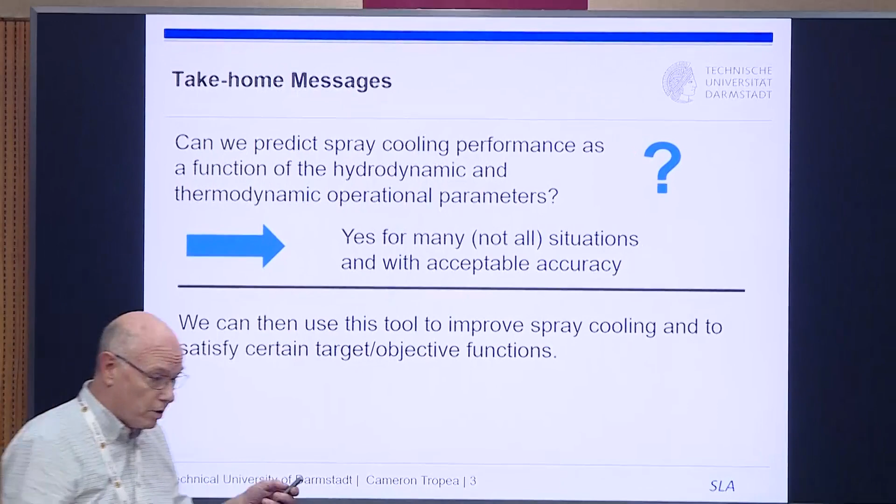Can we predict spray cooling performance as a function of the hydrodynamic and thermodynamic quantities? The answer is yes, we think we can do that, at least approximately, with some acceptable accuracy. And then the fun starts, because if you can do that, we could use that information to improve the spray cooling, or if we had a certain objective function we wanted to attain, how do we do that? What would be the Pareto curve to get us closest to that function? So that's the take-home message.

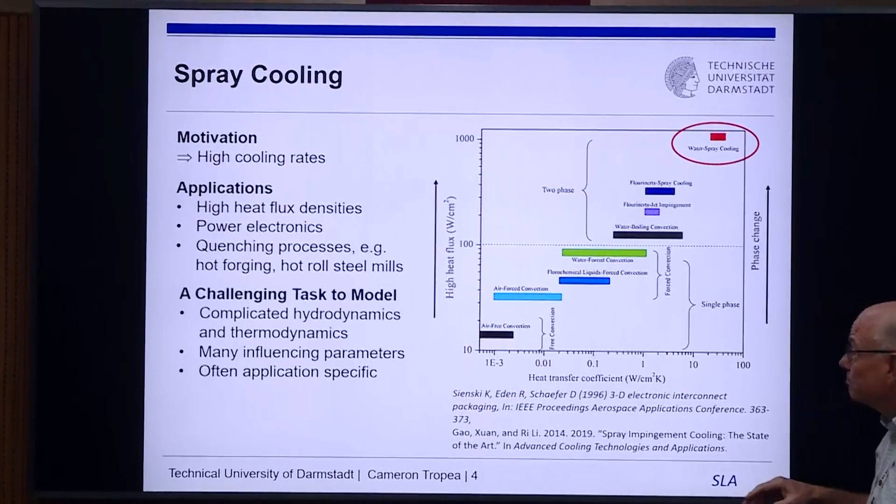This one I don't have to show you, you've seen it once or twice from several people. But obviously, cooling with phase change is better than without phase change, and that's water spray cooling. So there's interest in that, usually for high heat flux densities and high temperatures. The big problem is, of course, it's not easy to measure, and things happen at small scale, so there are a lot of empirical equations. We've seen several empirical equations today, and everybody knows: be careful, just use it in the field or range in which it was derived.

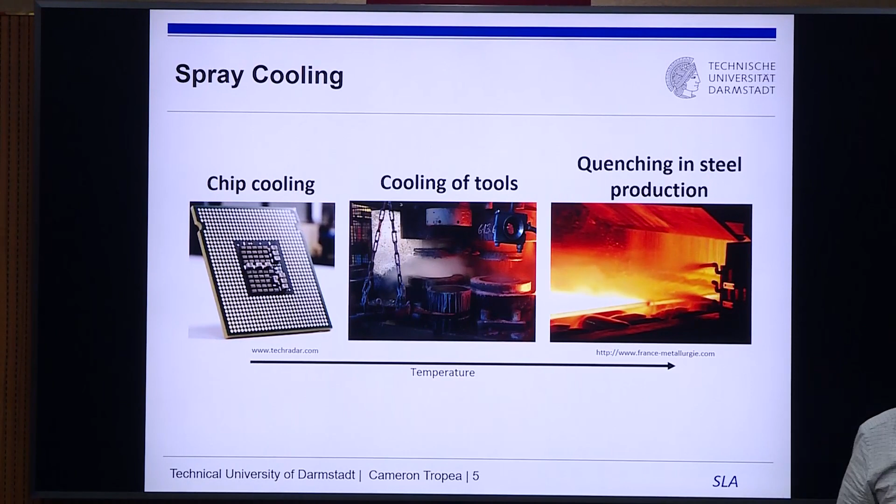I think we can skip this. Susmita showed us a wonderful picture of the same, so everybody knows where you use spray cooling. And the idea is we need good models for it.

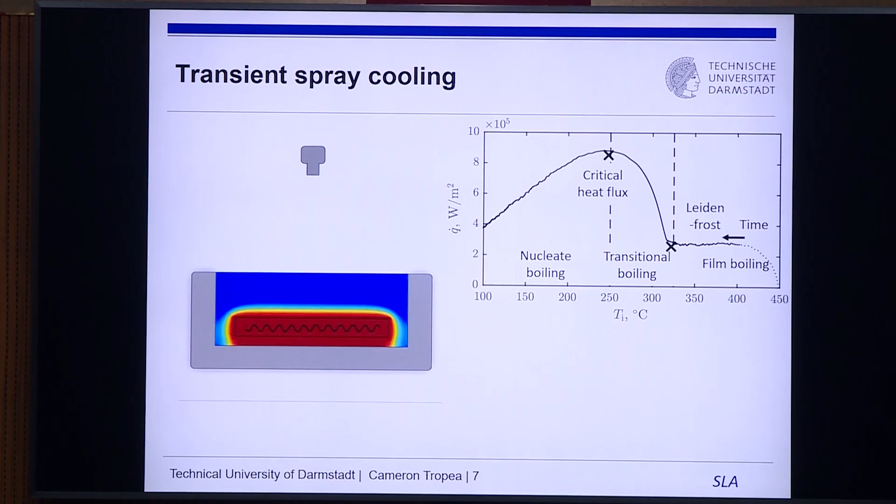This is something I have to actually work myself. I could never get this to start on its own, I don't know why, but we're going to accept it. This is now an experiment we did. I'm not going to talk too much about doing the experiment, but this gives you what we're going to talk about. First we heat up something to a high temperature, and then we say, so it's at some high temperature here—this is the overheat, or well, this is the actual temperature in that case.

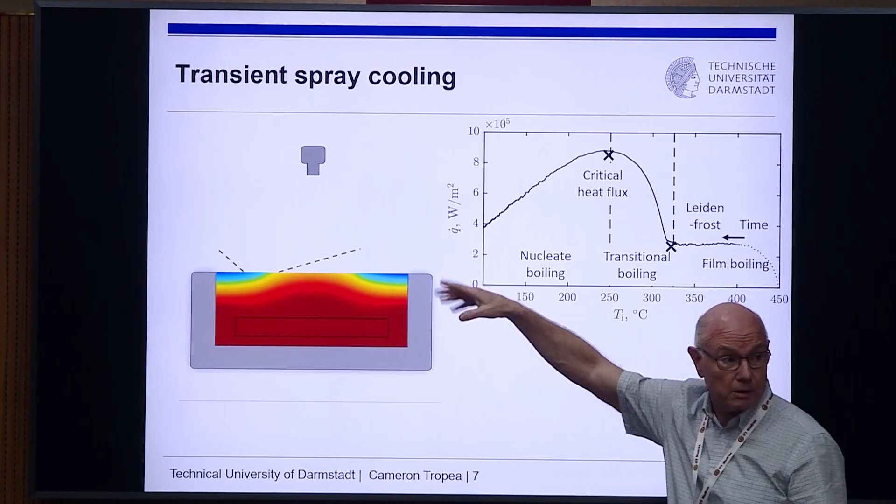Then we start a spray, and depending on the distribution of drops, the number flux, the size, all the velocities and whatever, it starts. That was a hollow cone spray, and it starts to cool this thing down.

If we took a very high magnification of what's happening here, where it's cold you're getting puddles. Where it's hot, you get film boiling—it's above the Leidenfrost point, so it just bounces, like the stove experiment at home. The droplet just bounces off, and so it's dry. Most of the time it's dry.

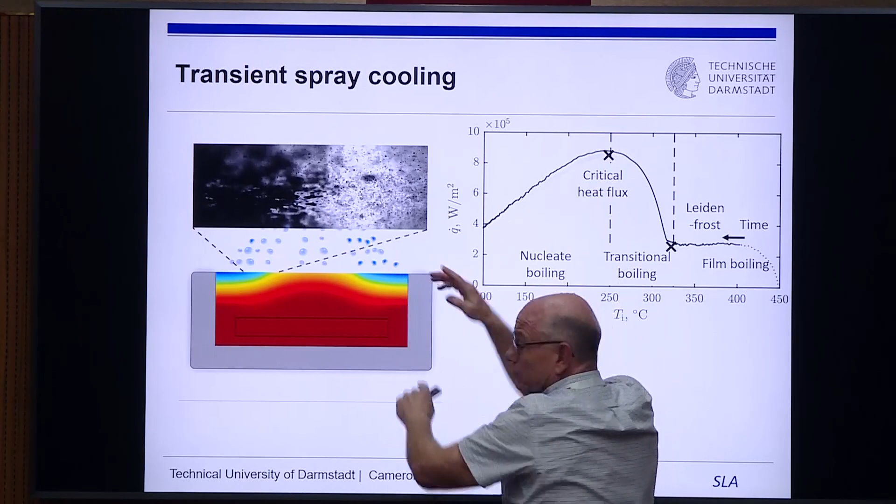It shows that, in time, if we continued and looked at this position, it starts hot, goes through some point, goes through transitional boiling, and then it goes through nucleate boiling. So everybody knows this curve, but here time is going this way by spray cooling, although it's a little bit different than if you're heating up.

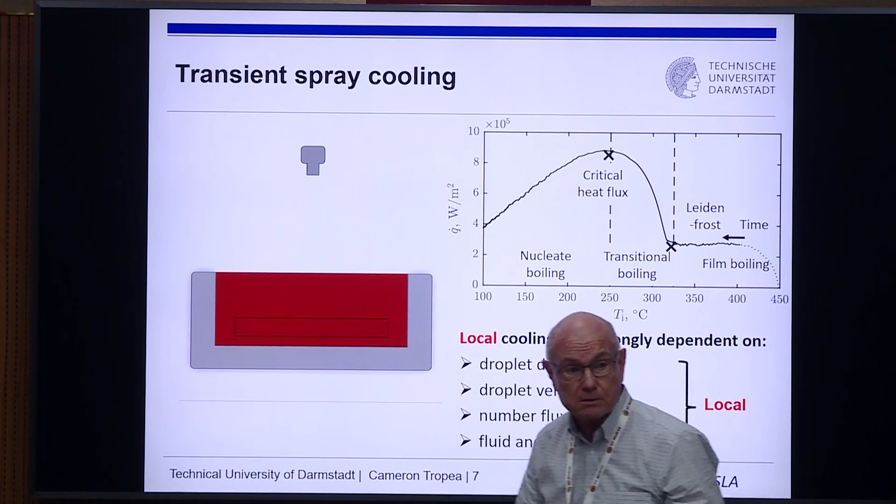The local cooling rate is different across the block. It will depend on drop diameter, drop velocity, number flux, and of course the fluid properties. And so that's the problem.

Let's go and look at if we can solve it. So this is basically the same curve. If this is the curve you just saw, this would be the temperature at any one point on that curve, and this would of course be your heat flux at any one point.

You can see, in our case—somebody had that question earlier—the transitional boiling is rather short, actually. It's not a long period in time. You might think, oh, maybe we can just forget that part, it's so fast, but it goes up sharply, so you have to take care of it.

I think this audience doesn't need a lot of explanation. So we had these pictures, and we had one of these Questar long distance microscopes with high magnification, so you could zero in on various spots and see actually what's happening physically.

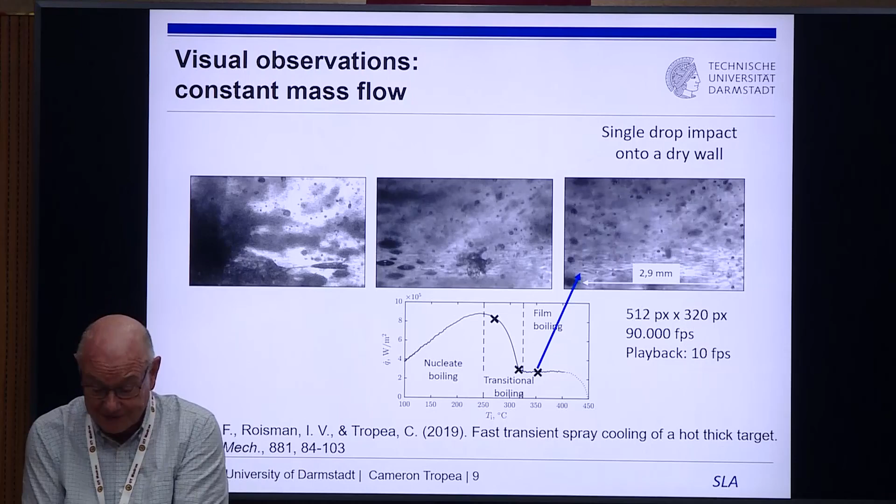As I say, you've got a lot of dry spots. And even in this area here, at this temperature, there's still a lot of dry spots, with some puddles starting to form. This is what you have to capture if you're going to model this thing, which is actually very good for us, and you'll see that in the next few slides.

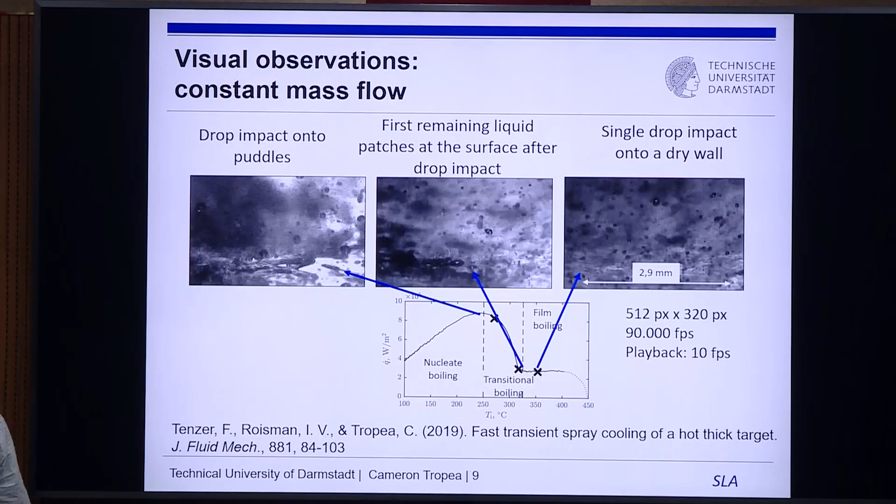So this is Fabian Tenzer—he did a PhD, and I think Peter Stephan mentioned you could download all the PhDs from some server. So what we take home from this is that through most of the regimes, only a small part of the surface is actually being cooled at any one time, where a droplet happens to bounce off or stay.

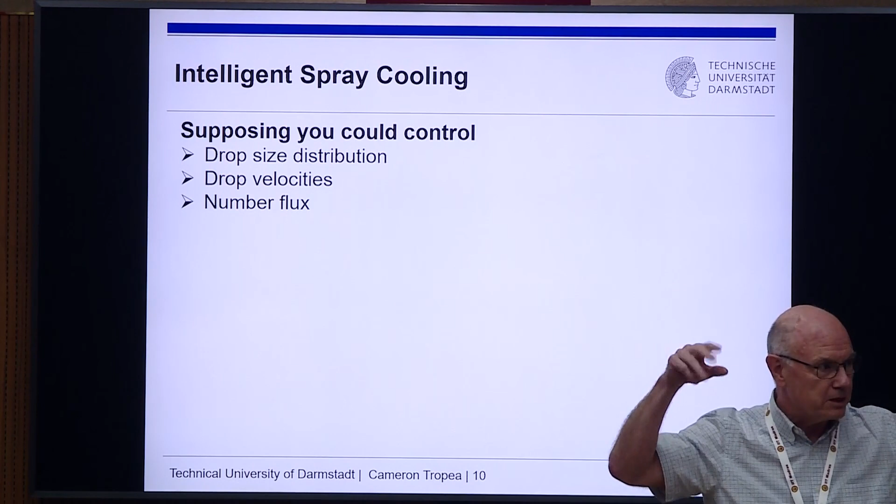So I've called this intelligent spray cooling. I'm not too sure if it's intelligent, but okay—supposing you could control drop size, drop velocities, and number flux. It's clear you can't necessarily do those independent of one another, but supposing we got into the position we could, sort of a shower head monodispersed drop generator or something.

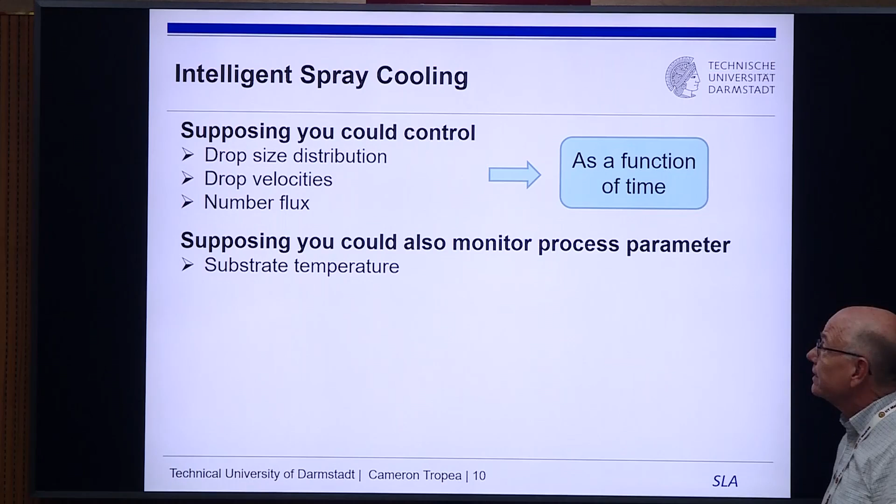Supposing you could do that as a function of time, so you could decide these different things over time—this is hypothetical, but nevertheless a good start. And supposing you could also monitor the substrate temperature, so you could know where you are on the curve, then you could start saying: what's my objective function? I've put down three or four objective functions, things you might want to achieve if you wanted to be intelligent, so to say, hypothetical.

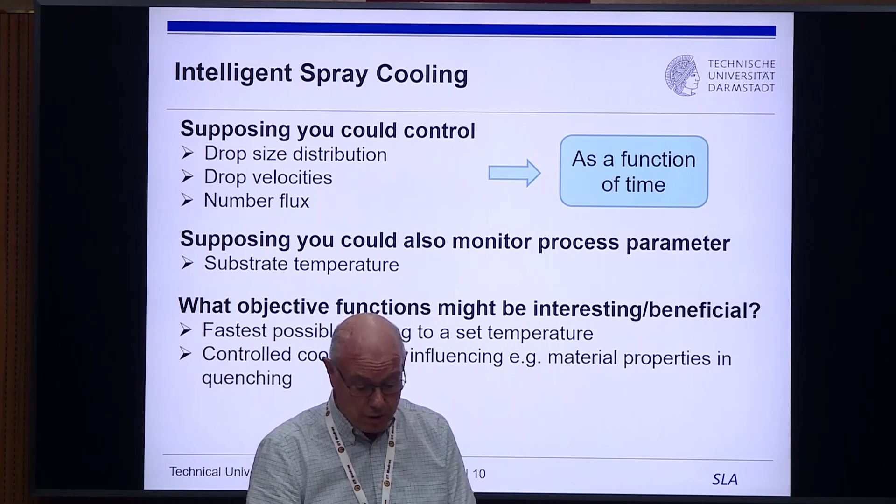So one objective function is cool down as fast as possible—why not, that's a good one. Or a controlled cooling rate: for instance in metals coming out of a rolled mill, the metal properties afterwards depend on the cooling rate and how long they stay at certain temperatures. So this is like quenching.

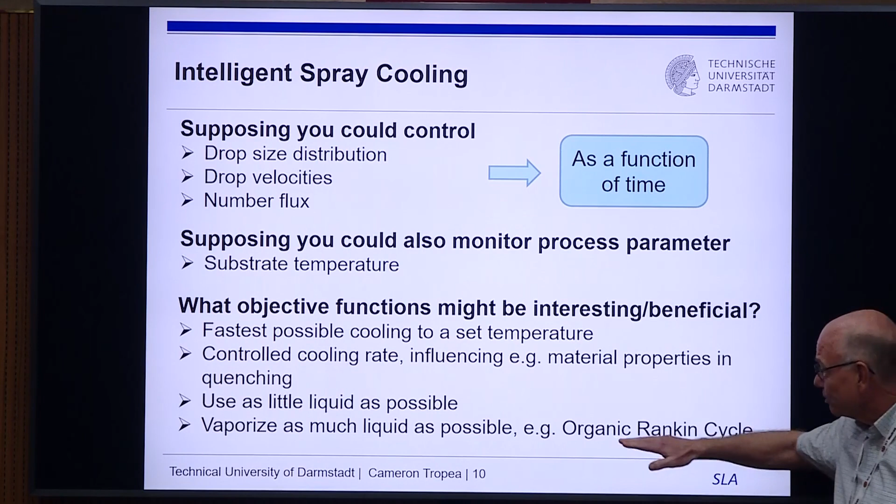And then one could be: use as little fluid as possible—why not, that could also be an aim. That's the reason we did the work, because Satya Sheshadri, who was working on this with us—he's the one who has the project—was working with his organic fluid. He was not interested in cooling, he was interested in vaporizing, which is roughly the same: the faster you cool, the more heat you get and the more vapor you have. So, any one of these could be the goal, but I've decided to take fast cooling with minimum liquid.

Supposing we wanted to do that. Okay, so we remember these: we have drop deposition, drops rebound, this is above and below Leidenfrost.

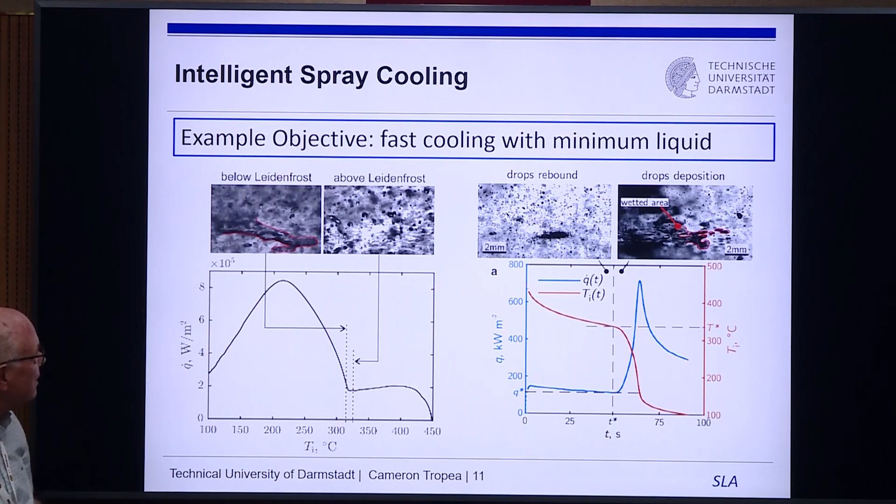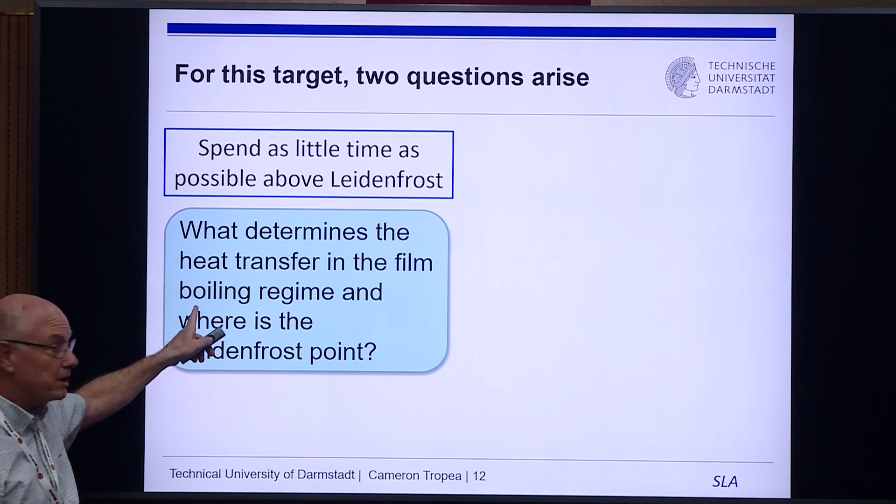So we could immediately have two questions we would ask if we wanted to get this objective function. One is to spend as little time as possible above Leidenfrost, and Sushmita said the same thing, avoid Leidenfrost. So get through that as quickly as possible. And what determines the heat transfer? Film boiling, above Leidenfrost. And where's the Leidenfrost point? You have to know that.

The other question is stay as long as possible at critical heat flux, so you'd want to know what conditions must be controlled to maintain it. If you could control all these things and be intelligent, let's do it. But now comes the practice, from the physics to practice. It's not as easy, and get through transitional boiling rapidly.

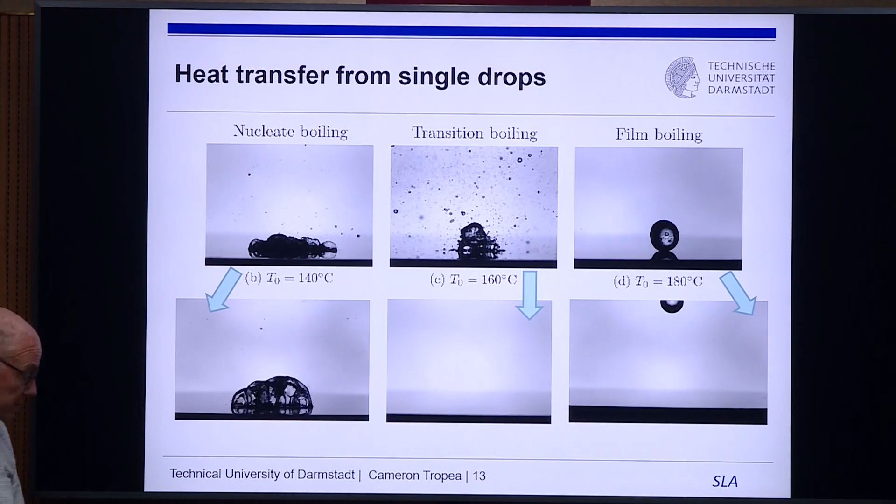Okay, these are single drop impacts. There's the nucleate boiling, watch carefully. The footprint doesn't change much. That's very important. Here's transitional boiling and film boiling.

This is what we call thermal super repellency, or the Marilyn-Monroe effect. Lots of small droplets, and then it comes up and gets away from the surface. Susmita showed the same thing, just a little bit faster. And this is, of course, the film boiling. It's that stove at home in your kitchen experiment.

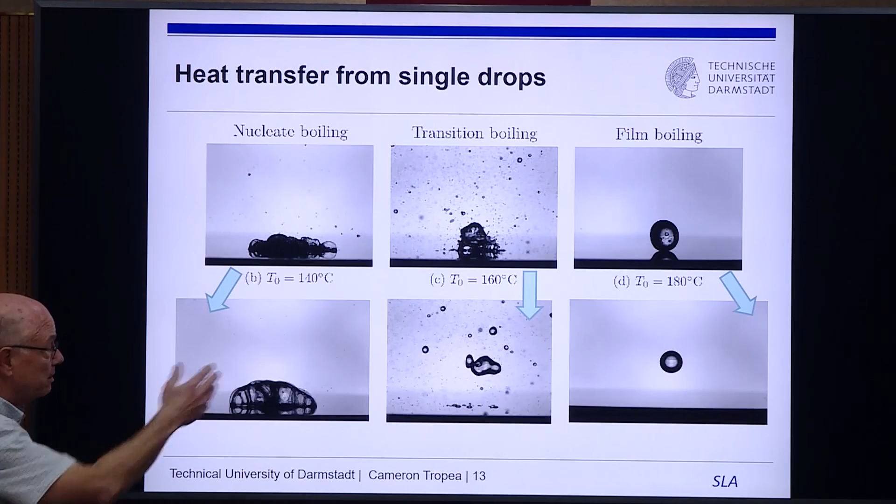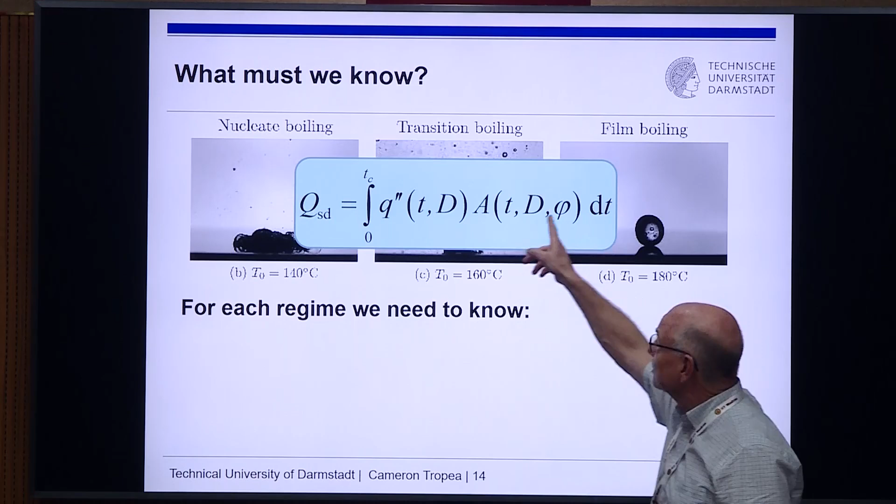Okay, so we understand the physics, and now what we would want to know in each of these regions, which we go through in time, starting with the film boiling, is what heat does a single droplet take away. We would say, well, if we knew the heat flux as a function of time and the wetted diameter, or at least the diameter of the drop - it's maybe not wetting in the film boiling region - and we knew the area, and this phi is sort of an oblique angle if there is some, you would integrate that over the contact time.

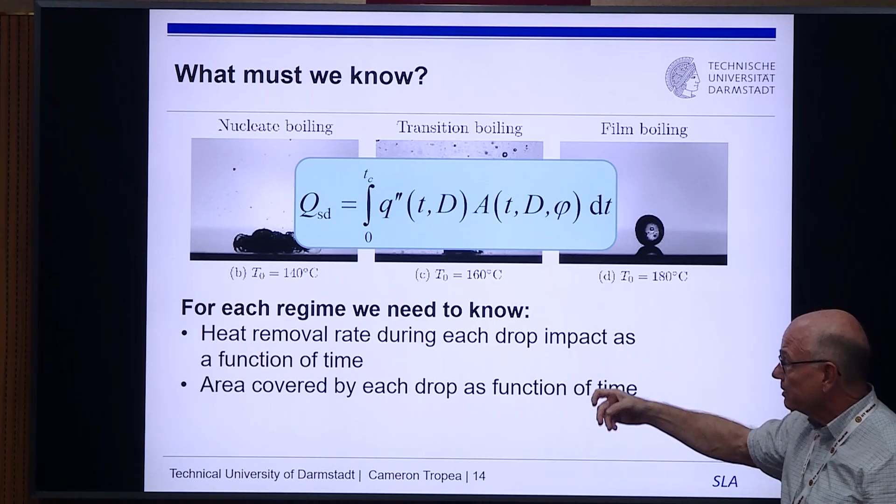Let's just call it maybe the residence time, or we'll use TC for now. And if you know that, then for each of these regimes we would like to know the heat removal rate for each drop impact as a function of time, the area covered, and the contact time. That would give us the heat removed per drop.

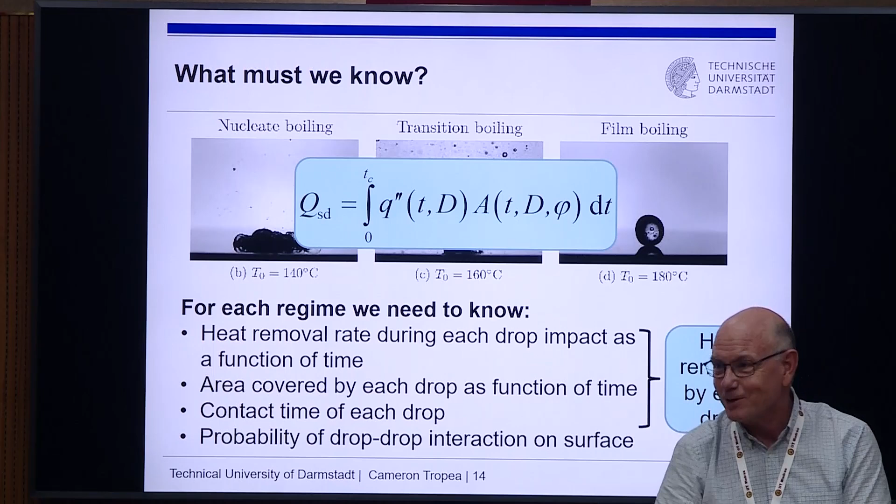Then the probability - this is a little bit funny now - because what happens is one drop spreads out, another drop comes, spreads out, and they interact. We did some wonderful work with Peter Stephan on that project, and you'd say, oh, maybe the heat transfer is not 1 plus 1, but something less than 2. So you'd want to know that probability.

Okay, but let's continue, we know it all, we simply know all of that. And now comes the frustrating part of the talk, because I'm not going to derive all of these things, but I'm going to cite literature in which it was very well derived and verified. So let's go. Please try not to get frustrated.

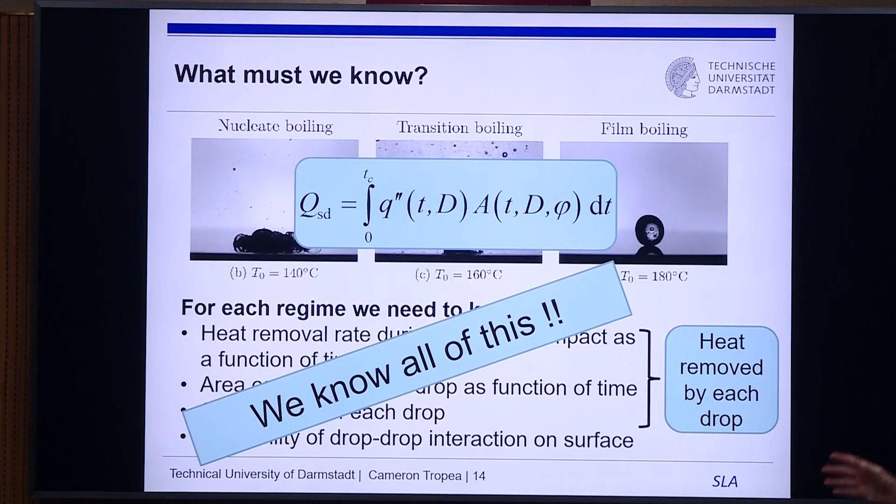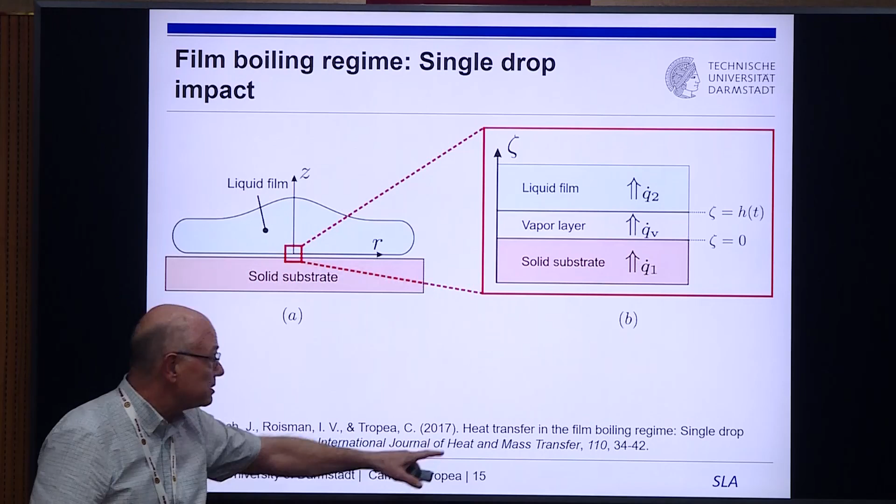The first one would be the film boiling regime, where you get this sort of pizza shape, and it's basically a one-dimensional heat transfer problem, because that thickness is typically 10 microns and you've got 2 millimeters or something. So it's a one-dimensional heat problem, done a long time ago. It's a very simple heat balance. You know the boundary condition here, the boundary condition here, the vapor temperature, the vaporization temperature, and then you've got the heat - this is latent heat of vaporization, and H is the thickness. So this is actually a well-defined problem, a one-dimensional heat transfer problem, and you can solve that.

And that's the heat removed. So you can see the diameter, which you're spreading out, as a function of time, and you've got the heat flux here, and you go. This is the time it takes to go out.

Now we do it - so I told you, please be prepared for approximate solutions. Most of the heat is taken out during the spreading, for two reasons: that's when you have the highest temperature difference and when H is the smallest. By the time it starts to come back, H is already bigger, the temperature difference is less. So we have a factor of 2.3 - I don't know, a small factor that we put in there.

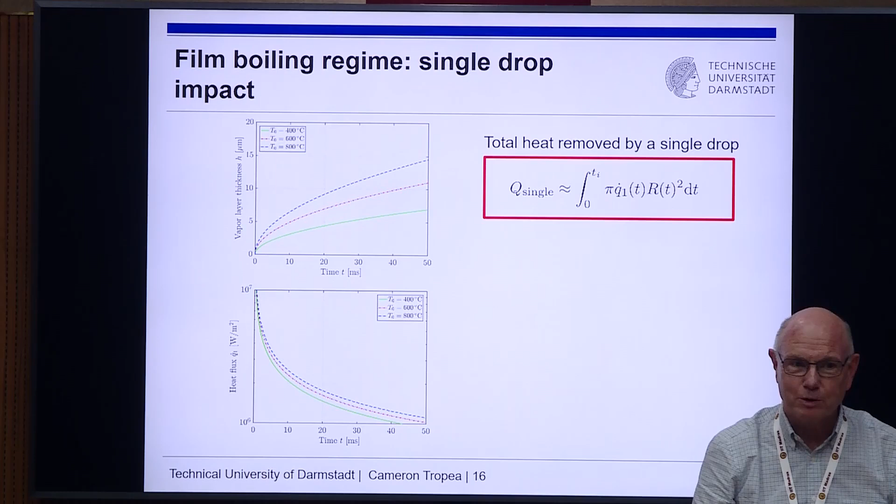But it works well, as you can see. We get some predictions here, and we compare those. So this turns out to be the solution, and this is this factor.

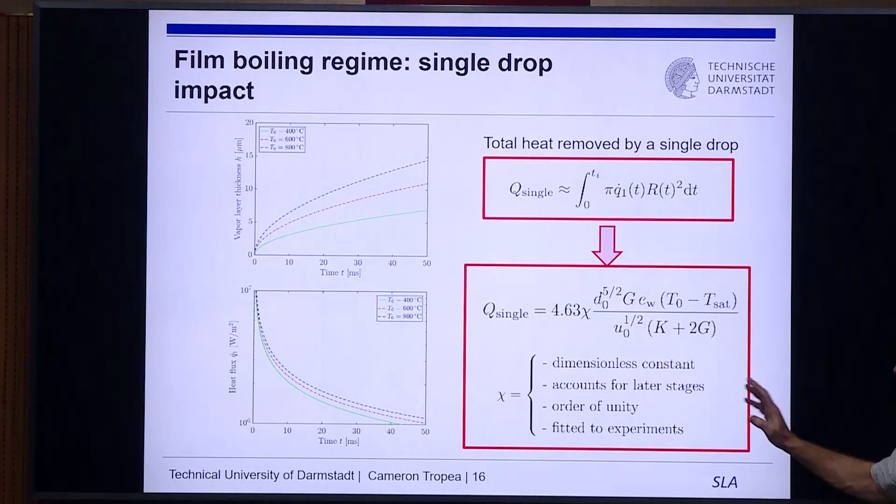And it looks like there's all kinds of weird things in here, but it's absolutely correct except for that factor. So it's just those heat balance equations. And I'm leaving out all of the details.

This is the frustration factor, a dimensionless constant that accounts for later stages. It should be roughly 1, not 10, not 100, but roughly 1. And we fit it to experiments. The experiments are wonderful.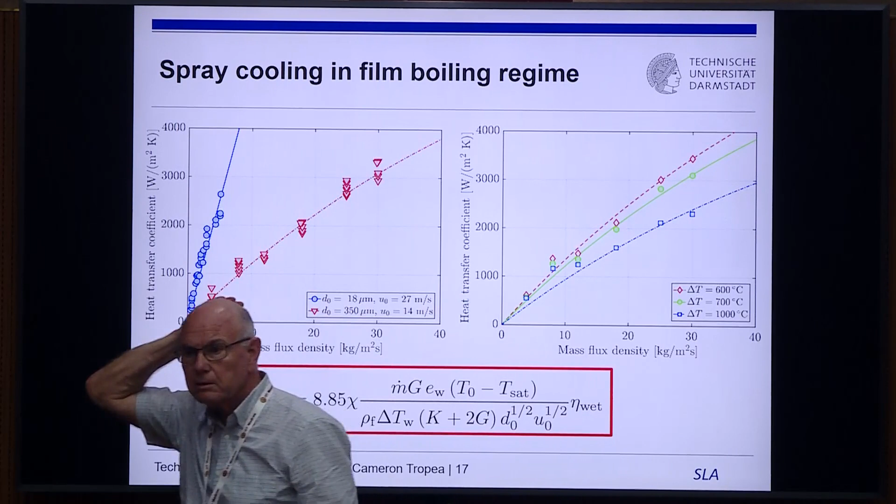These were done, one in Hanover, I think, and another by Specht. And this is with no change of factor from our experiment. Take a look: one spray is 18 microns at 27 meters per second, the other is 350 micron mean size. That means it works well.

We're not too sure, again, the experiments are not well described. We don't know, is it the mean, is it the Sauter, is it uniform across it? We don't know this, people don't always give you all the details. But in any case, we get very good agreement.

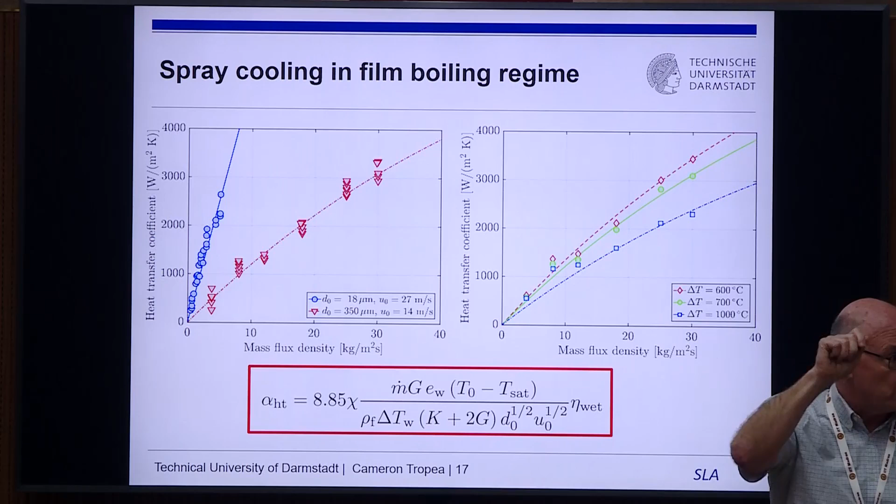So let's just say, okay, we know the heat taken away by each drop from a single bounce. If we're doing trampolining, then we would do many bounces. And let's just accept that that's pretty good.

Okay, now we go to the thermal atomization. This is the transitional regime, and we call this the thermal super repellency. This is where basically what happens: you get contact, and Susmita showed it. You get contact when it comes down at that temperature, then you get local boiling, little bubbles, they collapse, and you get these secondary droplets coming up.

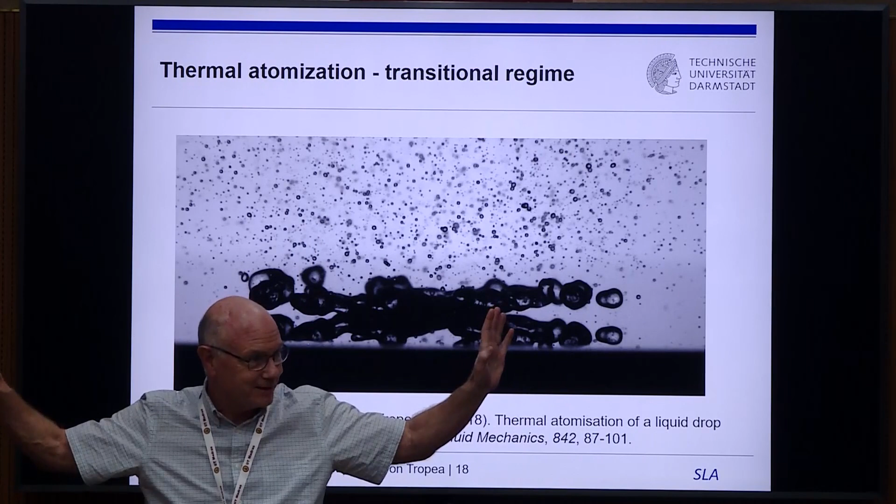So you've had a mass loss, and they sort of disappear. And then of course you get the vapor, and the vapor, that's the Marilyn Monroe effect. Now the vapor comes up and throws up the ligaments, and it retracts from the surface.

And this was done also some years ago, thermal atomization. So the question is, do we know the heat taken away by each drop impact for thermal atomization? And the answer, of course, is yes. These are very similar to typical examples from above.

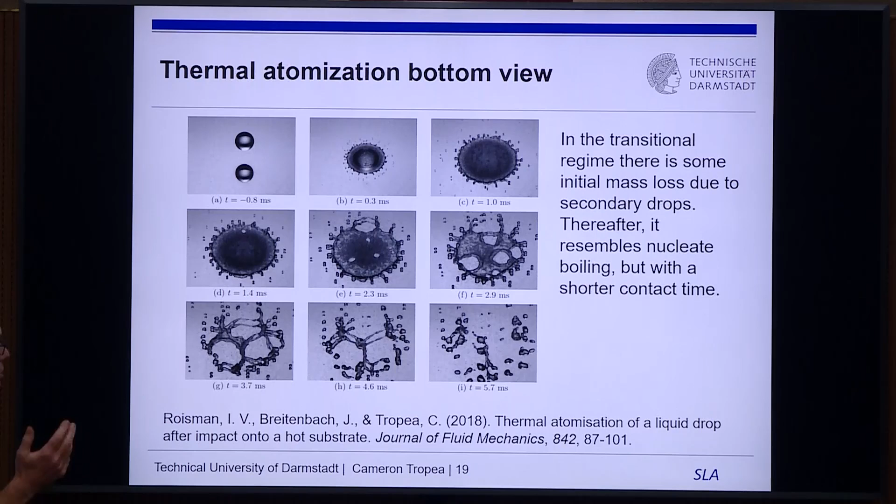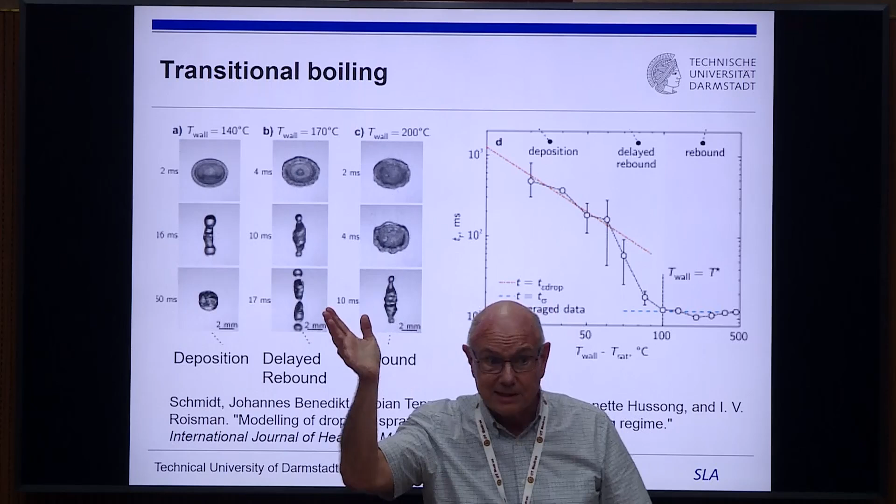Okay, so this is rather clear, and this is a little bit newer, this work here, but again with Benedikt Schmidt. So that's transitional boiling, and now the interesting part, we can move to nucleate boiling. So we actually know how much heat is taken away in the transit.

Problem is, because we know the TC, but the problem is you've had some mass loss. So it's like nucleate boiling, because you touch down and you get the bubbles and whatnot. It's like nucleate boiling, but it's shorter time, and there's not as much mass left. And nucleate boiling is really easy because the droplet goes down, it stays there, and it all evaporates.

So you know exactly how much heat is taken away, it's the latent heat of vaporization times the volume of the drop. So easy. But of course, with transitional, you've had some mass loss. So transitional merges into nucleate boiling, so to say.

Okay, and then you can measure this contact time, how long does it take? Because we know the heat taken away, that's heat of vaporization times volume. But how fast? That's more interesting, and that's the contact time.

How long before, I've called it contact time, the lifetime of the drop, that's what we should call it. How long does it take before it's all vaporized? You can see we get this value minus 1.92 as a function of overheat here. And in Leidenfrost, of course, it's constant, it doesn't matter what the temperature, it just goes and it's constant.

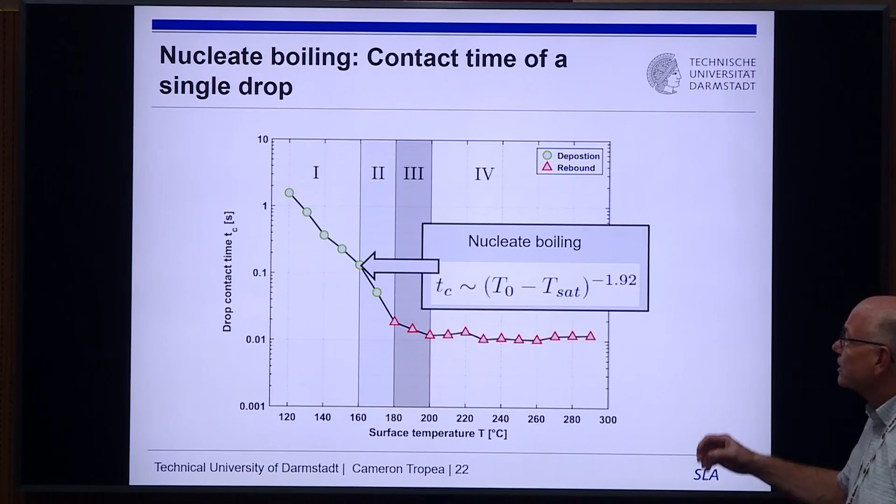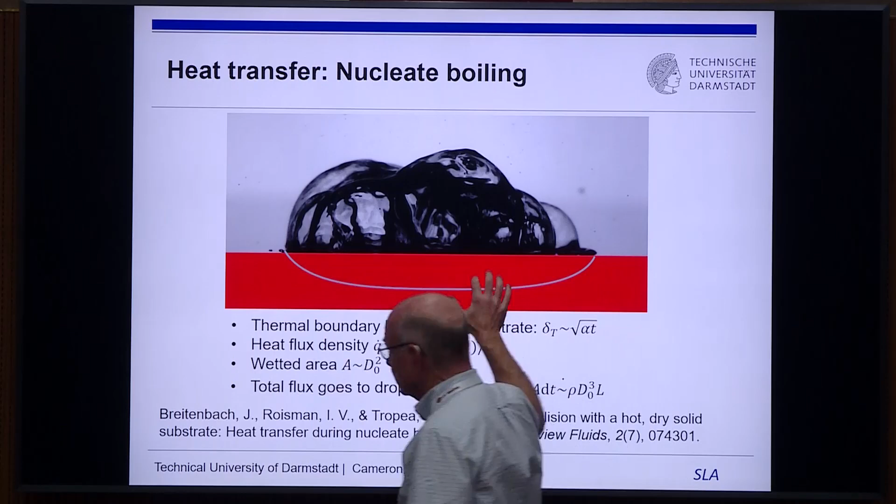Remember the footprint was constant for nucleate boiling. So we know the area, and now we have to work out the heat flux over that area for TC, which we don't know yet experimentally. So you have a thermal boundary layer, the heat flux density going in, plus sensible heat, and the wetted area is roughly d squared.

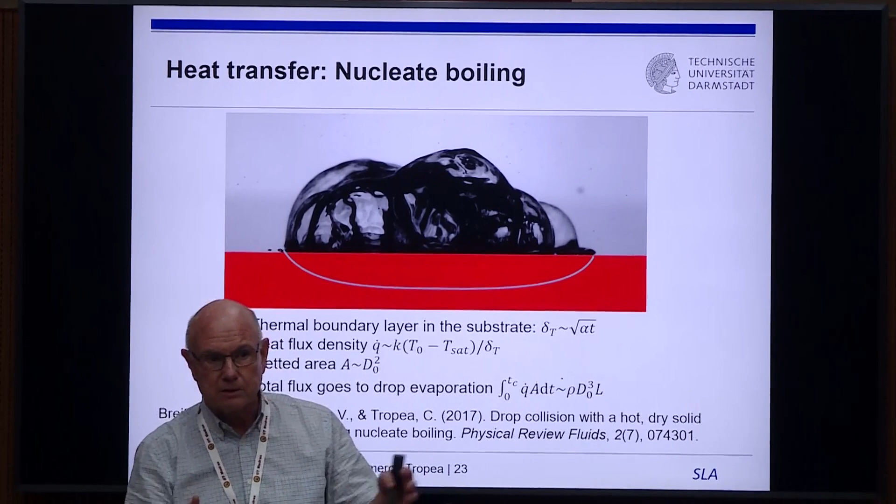We're going to make a fudge factor because it's proportional to d squared, and this factor is important because it carries any influence of roughness or wettability, how much things spread out. We're on a smooth surface today, so we have a factor of about 2, and we'll accept that, but for other surfaces you might need a different factor to account for wettability.

So the total flux goes into the drop, so we know the total flux. We know over time what the answer is. This is what I said before, and this is also from some years ago.

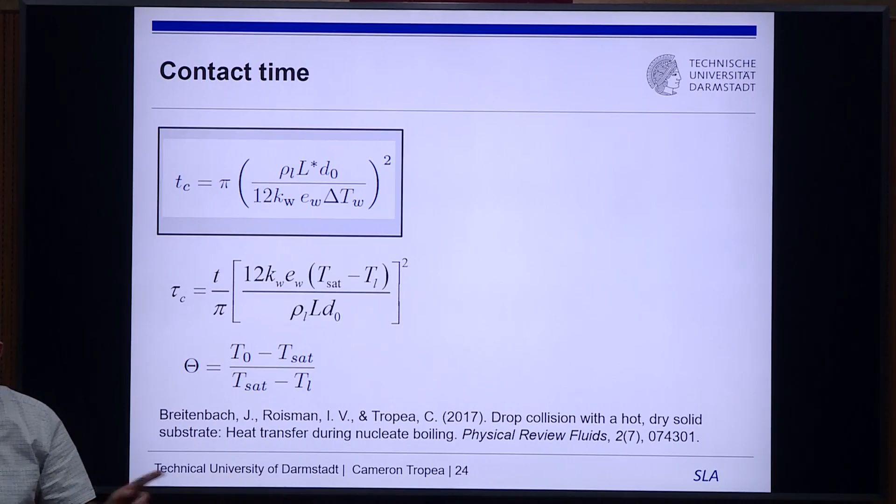So again, the fudge factor - I'm not going to derive those equations, but they're done in that reference and we verify them and get some solutions. The scaled wall temperature and dimensionless contact time, you can get from a lot of different authors, and I also had another one at different pressures. So it works very well.

Let's not concern ourselves with details today, we're going into practice. This is very important though. Now the question is - here's film boiling, we know how much each drop takes away, here's transition, we know that, here's nucleate, we know that.

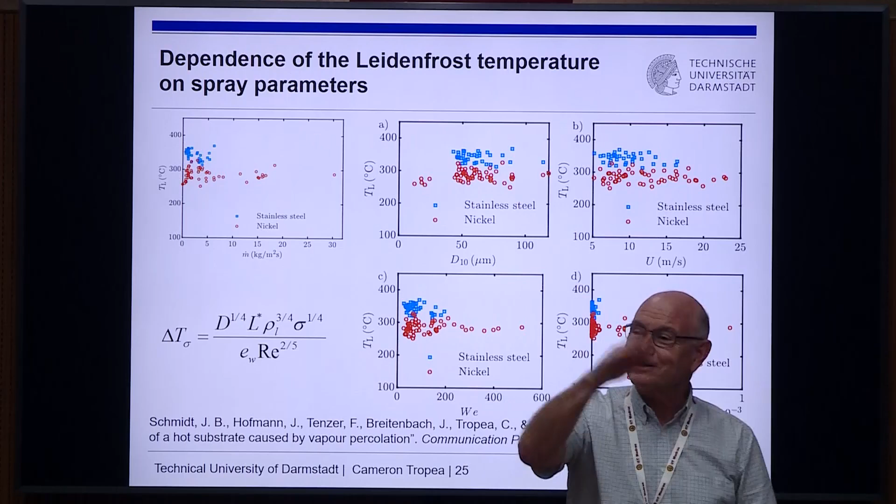But we have to know where are the boundaries. When do we stop film boiling and start transition? We have to know the Leidenfrost point, and we can measure that. We do the experiment, see where the curve goes up, and know the point of minimum, so we can measure the Leidenfrost point for every condition.

So this is the Leidenfrost - I've called it temperature here, but we like to say point because the temperature is different for all kinds of conditions. We change the mass flux in the spray, the mean diameter, the impact velocity, the Weber number or local Weber number.

And you can see it doesn't change with any of those parameters. But it does change if you've got nickel or stainless steel - then you get a change in temperature. So what we're saying, if you start thinking about it, that makes sense.

Because if you think about what makes that vapor layer - the vapor layer is created by how fast heat can get out of the material. So it's the effusivity, the effusivity is the important parameter, because that tells you how fast you can remove heat. So the Leidenfrost condition is actually a very strong function of the effusivity of the material.

And this is then the delta T, the superheat necessary - at that delta T you have the Leidenfrost point. And you can see it's a weaker... it works out actually very well. And this is also the film, from some years ago.

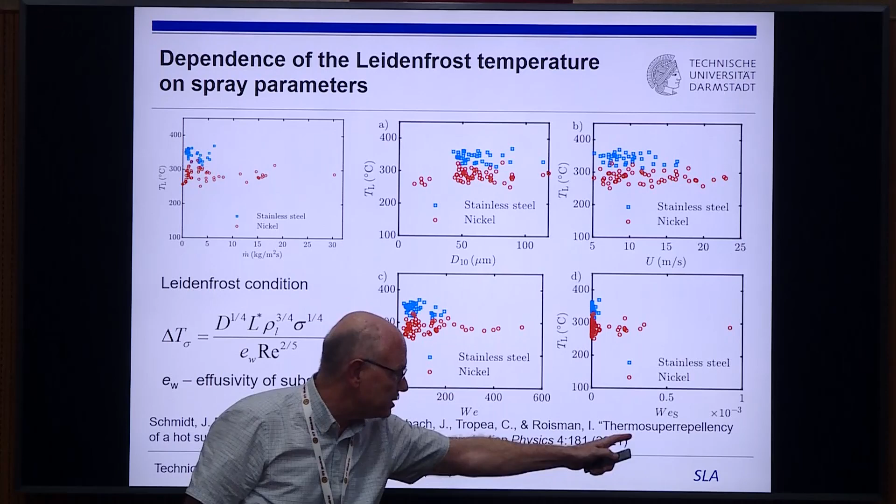Okay, so let's summarize where we are. We have film boiling, transition boiling, nucleate boiling. We know the time, the TC, we call it TC mostly. We know the areas roughly. We know the heat flux roughly, so we know for every single droplet how much heat is taken away depending on which area we're in.

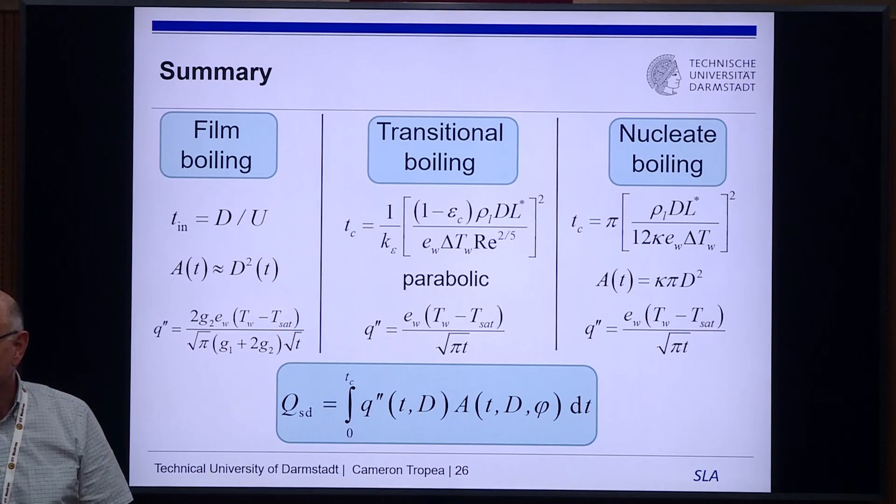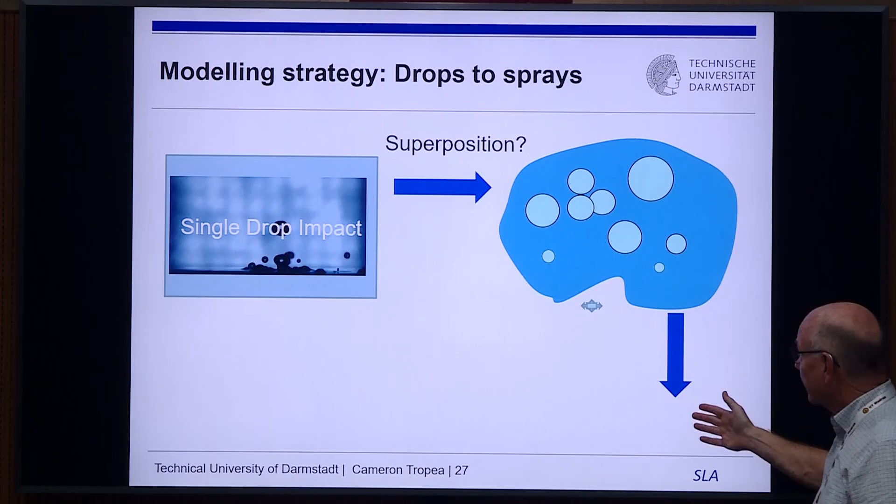So now, if you remember the movies, most of the time everything was dry. So immediately you think, let's do superposition - let's just add up all the droplets, which you can do. You get this sort of superposition, and then you add them all up and you could turn it into a heat transfer coefficient if you wanted.

And the number flux is then very important - how many, and in this, of course, is all the rest of it: how big is the droplet, how fast was it, and all these things. And then you do some - now comes the trick. Remember, I said maybe you get some drop-drop interactions.

What's the probability of drop-drop interactions? This is actually a Monte Carlo simulation. Some drops are just hitting or just bouncing back, some are a little bigger, and occasionally there's some drop-drop interactions.

So we've called it the wetting ratio. It's basically the actual covered area over the cumulative area. If you just did superposition, you had n drops, each covering this area, then n times that area would be the total. But if they're intersecting, then it's a little bit less. So this is less than 1.

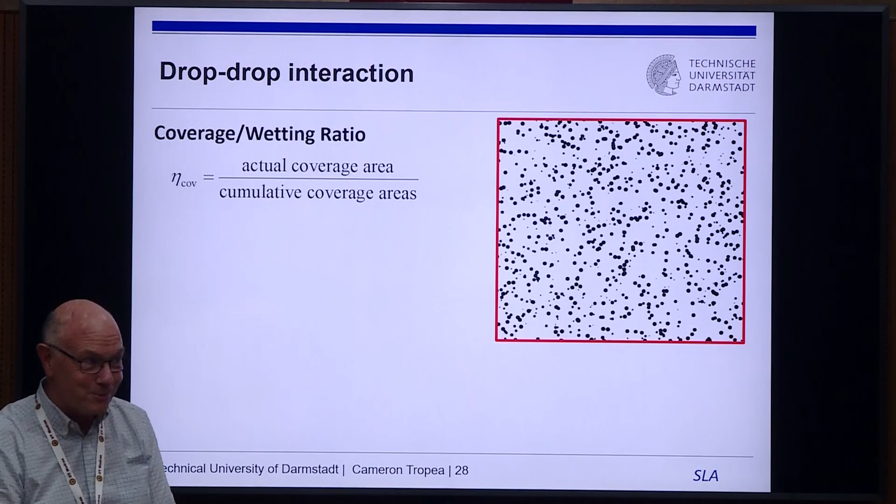It's always less than 1. The question is how much. So as long as it's near 1, superposition holds. If it's a lot less than 1, probably our answer is wrong, because we don't really know too much about intersecting drops and the heat transfer.

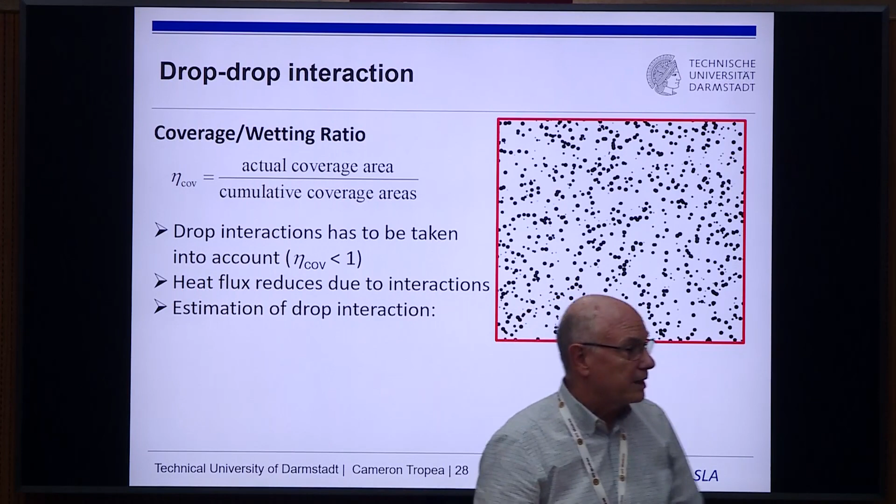So now we simply use, of course, the Poisson distribution. It's a random process we assume and just work it out as a Poisson process. But if we did get this, then we would just say, let's scale the heat transfer with something less than 1, because it'll be a little poorer than if every drop made a contribution. So the implicit assumption is that heat transfer scales with the covered area.

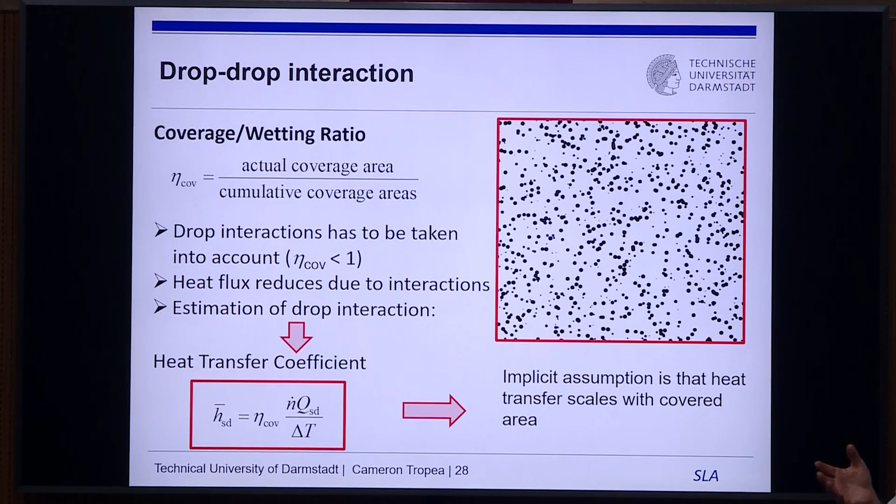Again, I have to appeal to you, accept a little bit of approximation here. It might not be exact. So this is actually together with Peter Stephan. We did this once, but this is like one single case.

So, two drops come down and they merge, and if it's a little farther apart, they don't merge much, and if they're closer together, they merge more. And then you measure the heat transfer compared with 1 plus 1, and it's less than 2. But then you have to also consider maybe one comes first and the other one comes later. And okay, we haven't done that. So if you're looking for a good dissertation, there's lots of work left to do.

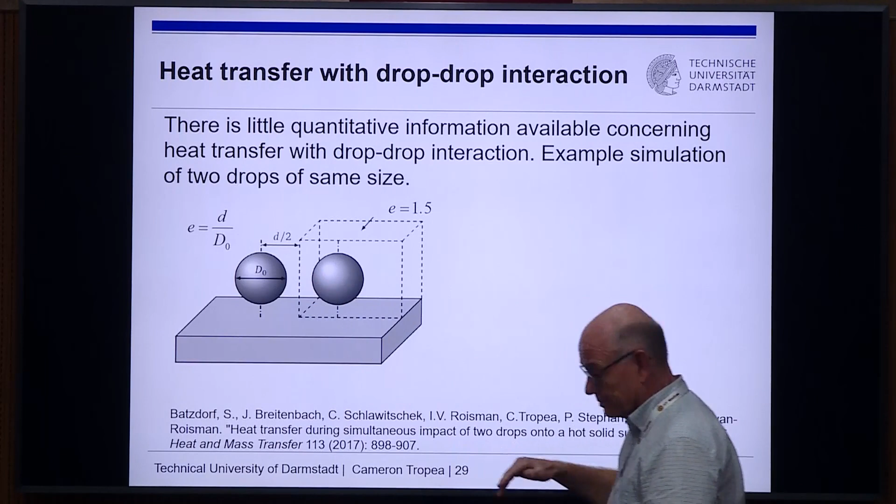Okay, anyways, so you have this sort of ideal case, there's some separation that comes at the same time, and sure enough, you get something less than 1. If the separation is farther apart, it's not much less than 1. If it's closer together, then you get it much less than 1, and this is not rocket science, but it's good science, I would say, and this was some years ago also.

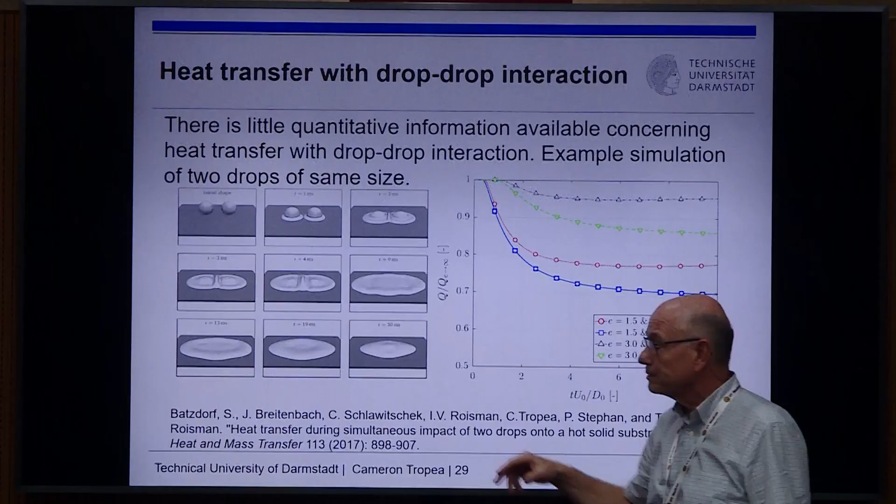Okay, so our estimation is, let's just use the effective area. Assuming impacting drops are completely random in space and time, then we use the Poisson distribution, where your lambda in the Poisson distribution is the average number of drops per area.

And we can know that because that'll be dependent on the number flux, the diameter, and the velocity, because the velocity determines how wide they go, and the number flux determines how often, and then you just use that in your normal calculation. And of course, the probability that you get more than 1 at the same place is exactly 1 minus the probability that k is equal to 0, and k equal to 0 is really easy to work out. So you know exactly the probability of interaction.

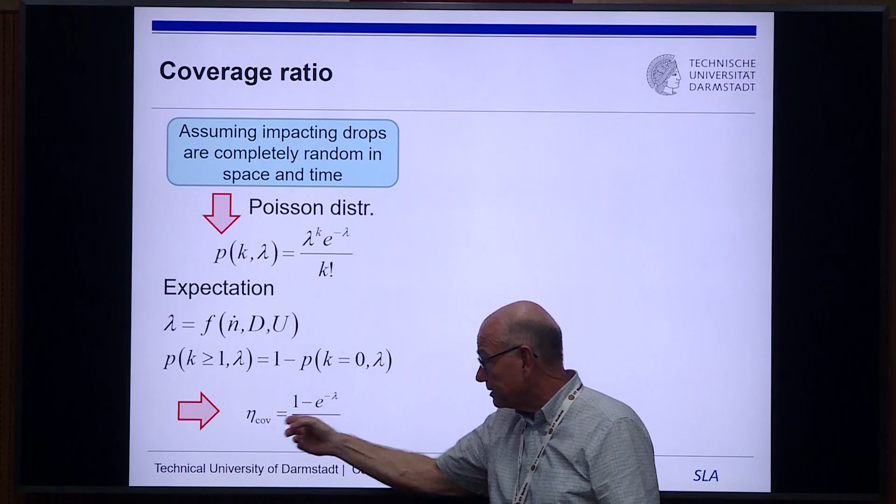And so you can work out that eta turns out to be an easy number as long as you can compute that.

Now comes the practice part. This is the part that Naila and I worked, I think, several months on. How do you get then the number flux? Because if it's a flat plate and everything's coming normal, no problem. Now what happens if you start going to more complicated geometries? You know, you have to cool maybe inside a cylinder or something.

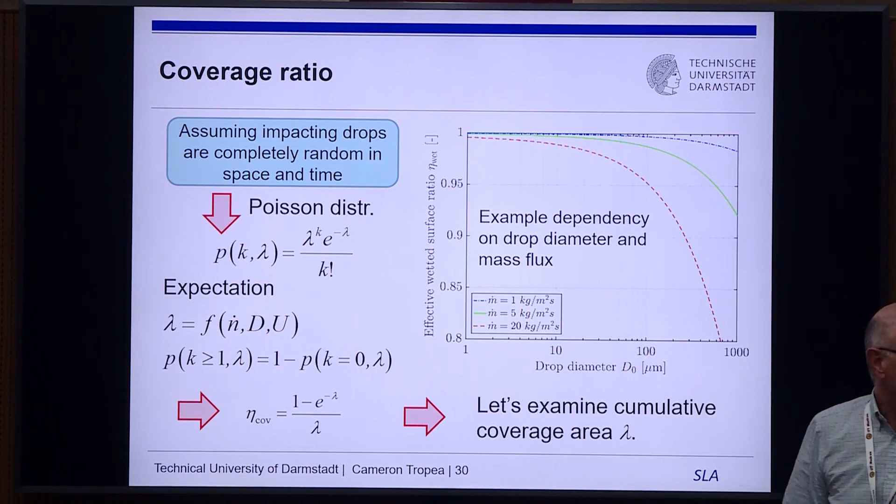Now comes this challenge. I always like to use this analogy: you're driving your car in the rain, and your back windshield never gets wet, right? Because the effective velocity is parallel to the windshield, and the number flux is a vector, normal to the surface. So the number flux is zero—your back windshield shouldn't get wet.

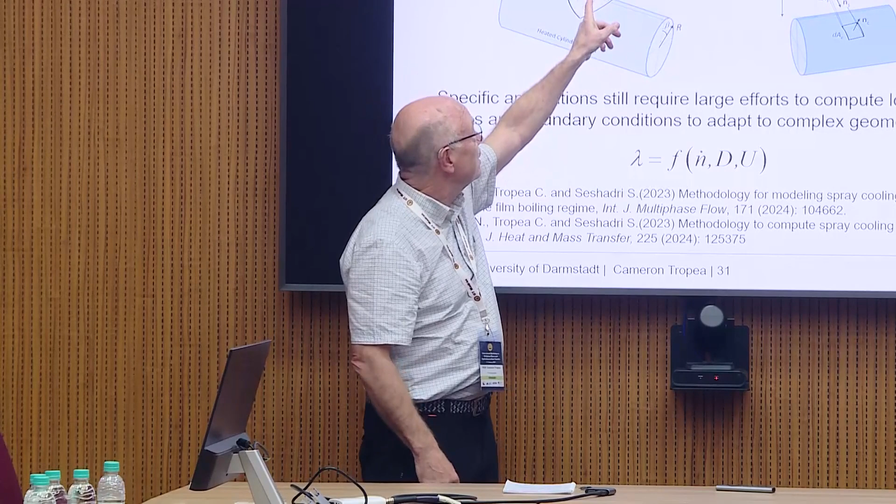So now you start looking at things like this, which is what we were doing with cylinders. Along here the number flux might not change too much, but along here it'll go to zero at the edge because they're just glancing off the surface. So you have to start doing vector algebra to work out the effective number flux—if you know the droplet size, velocities, and number flux locally in the spray cone, and that's hitting some surface, you have to work out the local number flux.

That's an important parameter for all of these things. It was in the heat transfer coefficient, it's in the alpha, the lambda of the Poisson distribution. So you have to work that out. It sounds easy, and I hope I made it sound easy, but it does take time—it's definitely one dissertation.

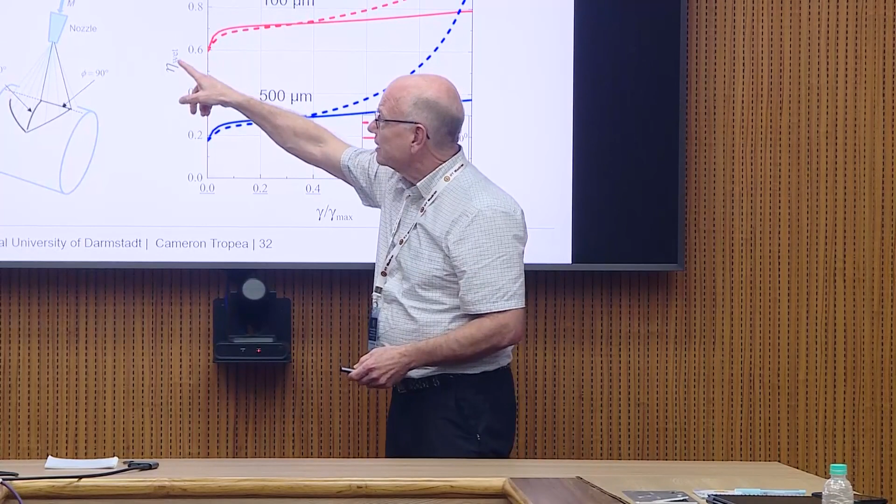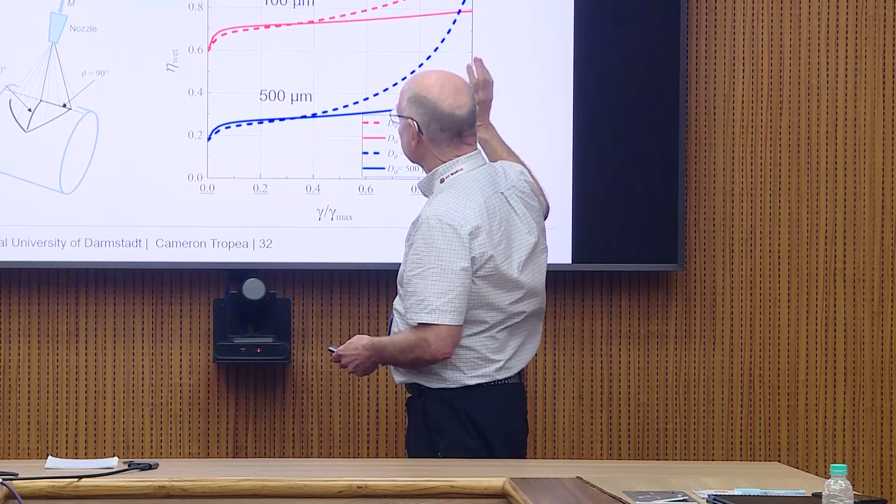So you could see, for instance, this is a complicated diagram. This is eta, so if it's 1. This is gamma to gamma max—gamma max is here, and if it's 1 you're out at the edge, if it's 0 you're in the middle. This is for a given diameter. This one is moving along here, and the other is moving along there, and you can work out this eta. All I'm saying is that's the arithmetic you have to do to carry on.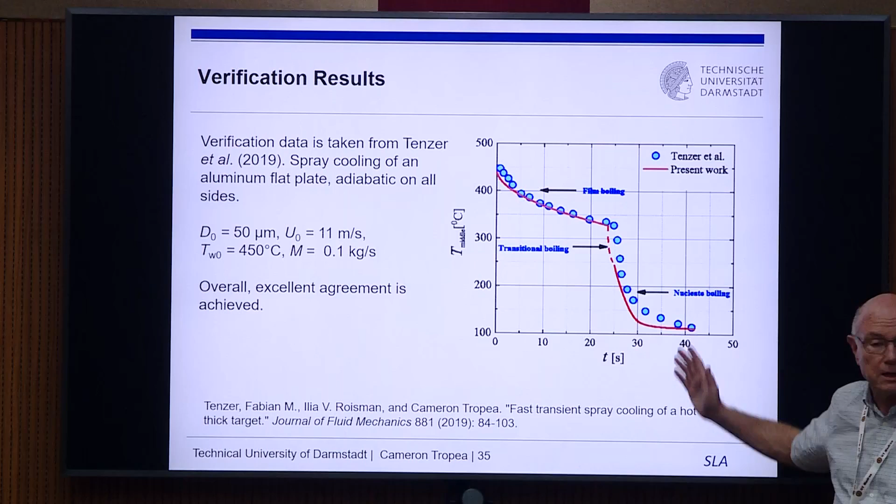So now the fun starts. You've got this tool, and you say, okay, we can believe it—let's see, if we change different things, what happens? This is rather good work.

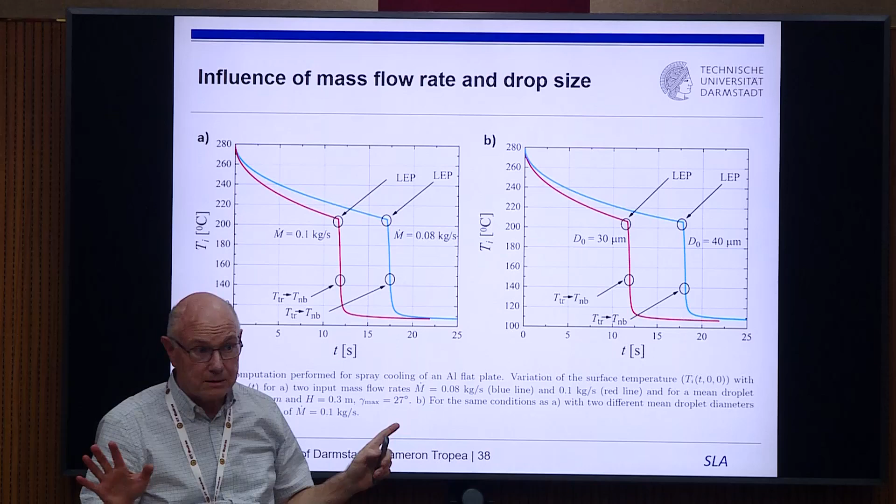This is things like, for certain data numbers, we change the velocity and see how this cools. It starts at a high temperature, goes through film boiling, goes through transitional boiling, gets into nucleate boiling, and eventually is cooled down. You can see how things change with velocity, or with the mass flux in the nozzle if you assume everything is uniform in the spray cone, or with diameter. These might not be exact temperatures, but you get the dependencies, and you have a feeling—now I understand it.

Some are non-intuitive, by the way. I'm not going to describe all of those, but sometimes you look at it and ask why the bigger droplets should be slower cooling down than the little droplets. It's not immediately obvious because the bigger droplets have a bigger area—they should take more at a time. But for the same mass flux, remember the number of droplets will go as one over d cubed. Same mass flux in the nozzle, and if you go to a smaller droplet, you have a lot more smaller droplets. And remember, the number flux was an important parameter. So it's not always intuitive.

This is what I think is rather valuable now—at that point you can start seeing these hidden dependencies or interactions.

We did this just for the sake of a lot of people who I think don't do things properly. You get all kinds of publications: 'I changed the height of the nozzle and measured the heat transfer rate.' Who cares? It's not the height of the nozzle that's important—it's the number flux, the velocity, and the droplet diameter that's hitting that local position. That might be a function of height, but that's not the main parameter.

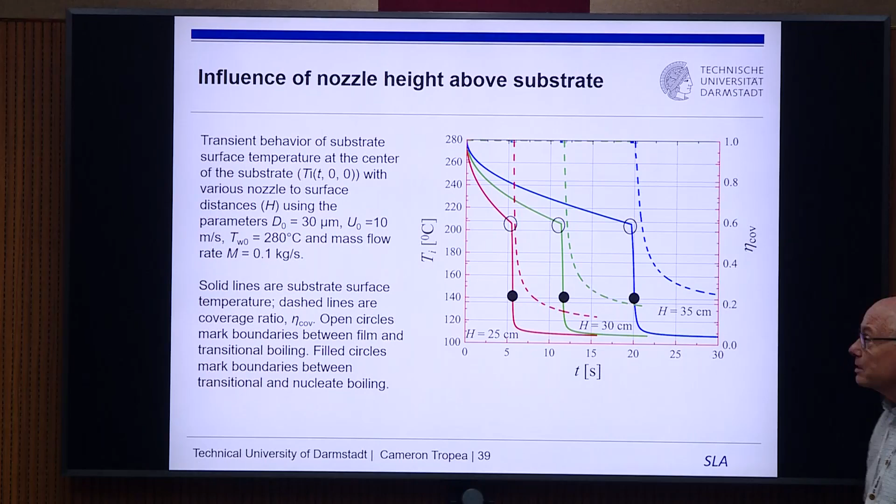So we said, okay, if we kept everything constant and changed the height, of course you get exactly what you expect as you change the height. If you go up higher, then it takes longer to cool because the number flux goes down, for the same area. Actually, I'm going to skip over a few of these things because I think I'm actually finished.

I basically told you what I wanted to tell you, and you could carry on and do all kinds of different things. However, there is one more slide I would like to show, and there's a little story behind it. Just a minute.

The story behind was that Marco heard something similar at ISC a year ago, roughly. And he asked us whether the mass flux should be non-dimensionalized, which we did. The question is, if you wanted to non-dimensionalize mass flux, how would you do it?

With what quantity? It's actually quite simple. For a given diameter, spray cone angle and area, you would ask what mass flux you'd have if all of the droplets spread out to the same area you're cooling. That would give you mass flux 1. Usually you have something less than 1 because there are dry spots. Sorry I didn't put it in, Marco, but we have that.

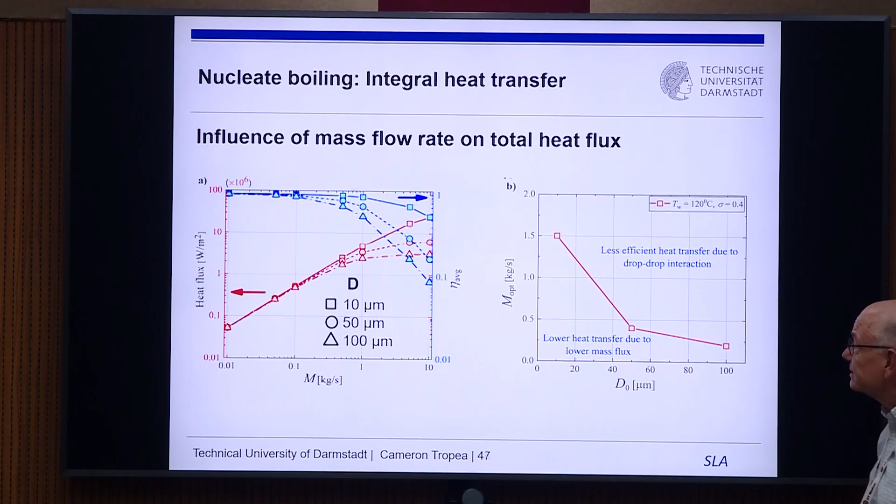I did have one last thing. This last one isn't published or anything, it's just new. You hear a lot of times, oh, if you had intermittent spraying, it could be faster. Why? This again is non-intuitive.

Supposing you said intermittent spray could be faster. Why? Because when you stop spraying, the surface temperature would heat up, and when you start again, you'd have a higher temperature difference and get higher heat transfer. Don't worry about that, it's not going to be better. It's always going to be worse. We're just working on exactly the conditions where that's going to be worse.

This is unfinished. All I'm saying is that now you have a tool to play with these things and try to work out what might be better or worse with some degree of reliability. Thank you very, very much for your attention.

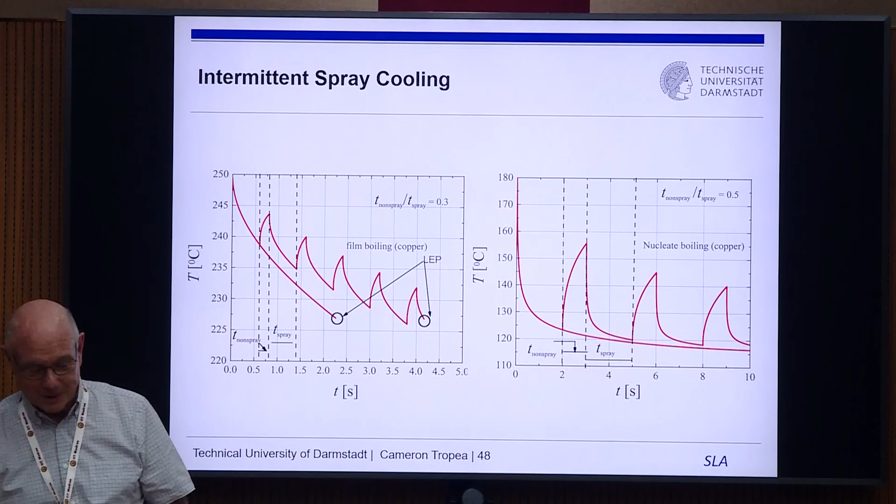I have a question on the intermittent. Have you investigated all the different intermittency parameters, like the spray duration, pulse width, and so on?

Even yesterday we were talking, so we're working on that. We might find an intermittency duty cycle that works better. We might, because as of now it seems that it is not as good as continuous spray, but there may be a potential.

Yeah, but I think it depends a little bit on what conditions you use. Let me say where I think it might be better. If you had a certain mass flow rate through your nozzle and a certain number density, and you just turned it on and off, that's going to be worse than continuous.

I can tell you that's what we did. But if you turned it on and off while changing the mass flux so that the same total mass went through as with continuous, then it might be better. I was going to write him an email last night, but we'll do that in the next day or two. And then it could be better, but then you're changing your mass flow rate.

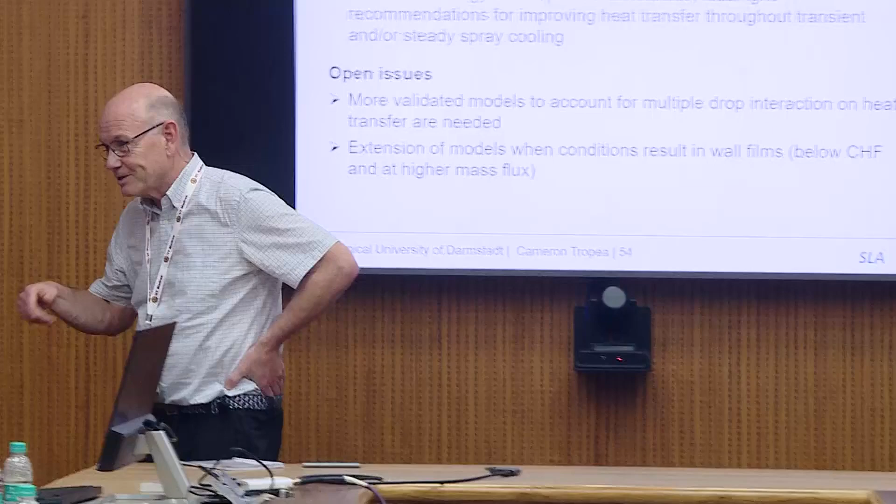Exactly, then it's a comparable mass flux, so it's a little bit trickier, you have to control your pump then. It's something we are thinking about. But that could be better. You're right. But okay, all I'm saying is now we have a way to check it. Didn't have that before.

Okay, Monu, don't start experiments before knowing this. Wait for the result. But it's too late, we already have the design. Let's try it. Okay, we are going to validate.

So, Cam, you made the assumption that all your liquid is reaching the surface, right? And we know that's not true because, in experiments with paints, we know something like almost up to half is overspray and doesn't reach the surface. And when you change your droplet size distribution, the thought experiment you're doing where you make the droplets smaller—because at one time we said if you make your droplets infinitely smaller, you'd get a perfectly even paint spray, except none of your droplets are going to reach the surface.

That's correct. So how do you, when comparing with experiments, account for that, or how do you deal with that? Yeah, it's a great question because obviously overspray is rather important. And by the way, wind drift is also important for agricultural sprays.

Yeah, that's what I'm saying. Overspray transfers all of that. So efficiency changes when you change your size distribution.

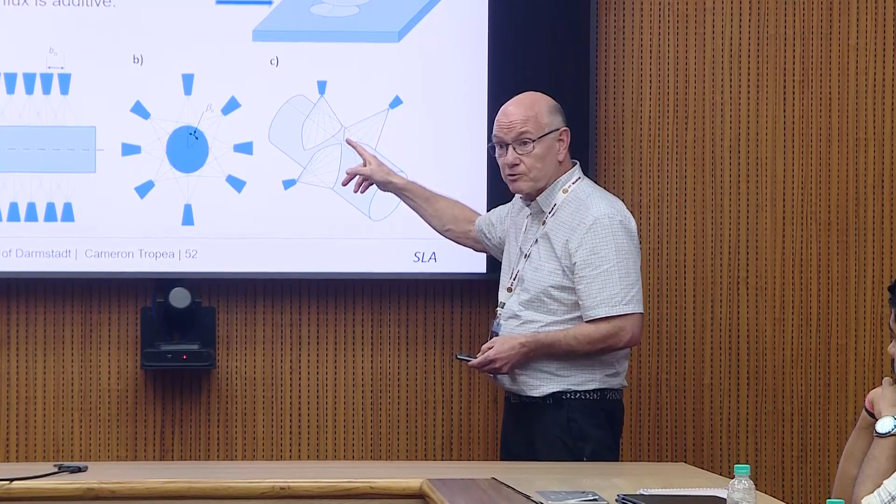This was my appeal to accept that it's not exact and we're just approximating things. But we have a condition where, by the way, this is a good example: we've made the spray cone angle such that the last droplets just hit tangentially, so nothing goes beyond the cylinder.

But this is something you could easily program into the model. You take into account that you're spraying this plate, your spray is up here, and some of it goes over here and never hits the plate. You can take that into account in the program.

That's not a problem. But you're right, what you mean is overspray through induced convection, and this we don't account for. It's also that smaller droplets don't have enough momentum to actually get through the boundary there.

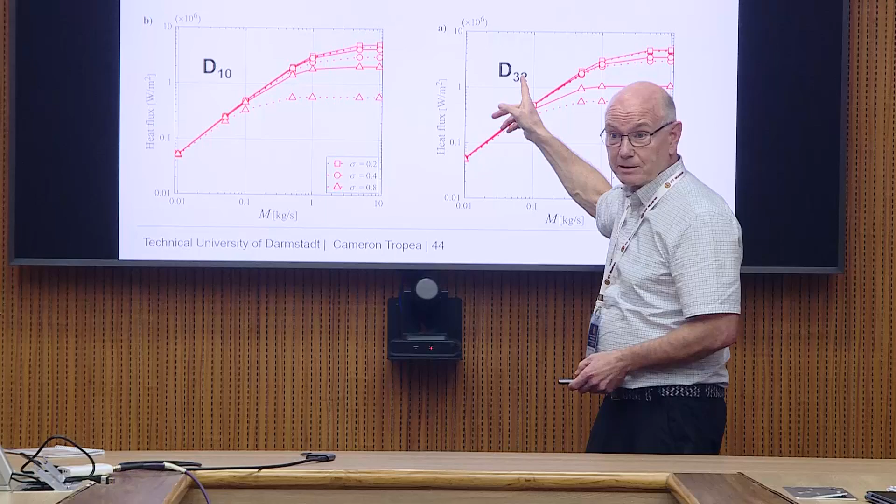This is another really important point which I skipped over, because what we did is we made polydispersed and monodispersed sprays, and then asked: if you had a polydispersed spray, would it be better to take the mean or the Sauter mean? The Sauter mean in fact gives you a better answer. The difference here is smaller than the difference here.

The other thing we did, which I don't think I put in here, is this transitional and film boiling case.

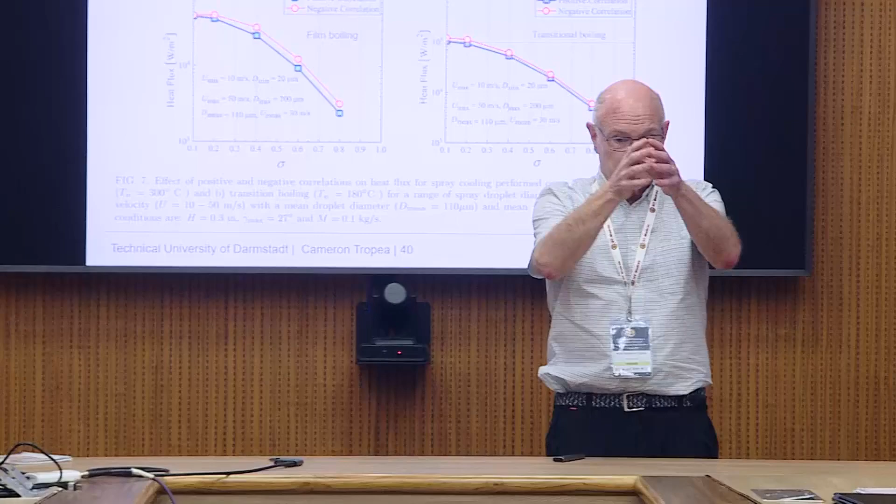So what we did is we considered a positive correlation between size and velocity, or a negative correlation. Just to make it clear, if you were spraying into ambient, the big droplets would be going faster than the small droplets, they would slow down less, so big droplets are faster.

That's a positive correlation. But if you're injecting into a fast-moving turbocharger or scramjet, the little droplets would accelerate faster. Small droplets would be faster, giving you a negative correlation.

So we did the positive correlation and the negative correlation with a log-normal distribution, with some Umax and Dmax and so on. It's always the case that your positive correlation is worse than your negative correlation.

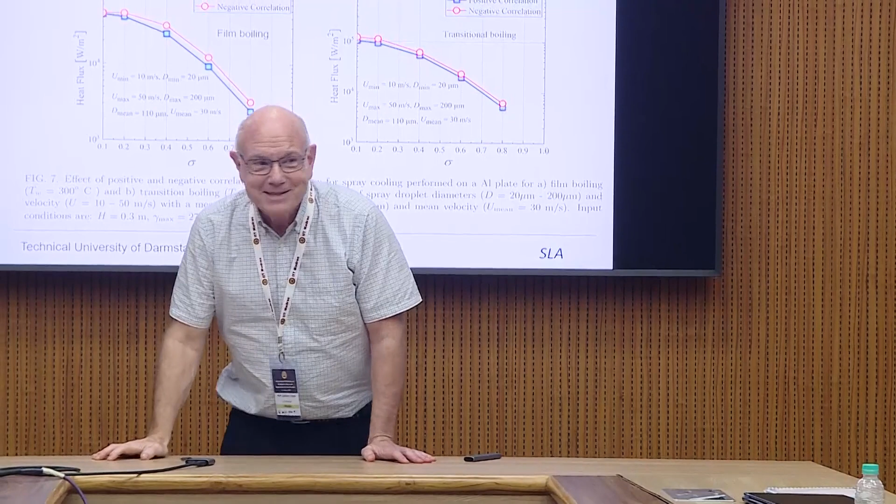But it tells you the best thing to have is a bunch of really small droplets going fast, which is what you said - infinitely small, going really fast, and they all hit the surface. That's the best heat transfer you can get.

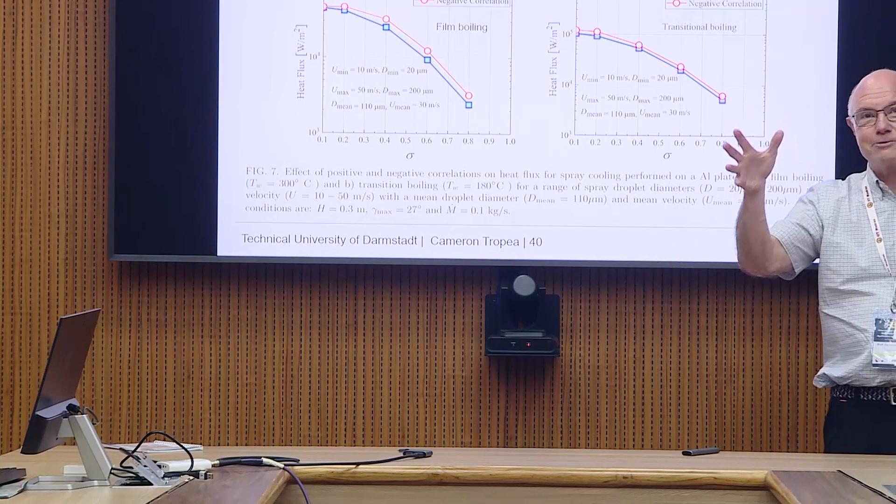When we were doing the Gesenkschmieden, hot forging, and working with them, basically the idea would be to have a big room, fill it full of fog droplets, and then blow it at the surfaces. That would probably be the best solution, but it's completely impractical.

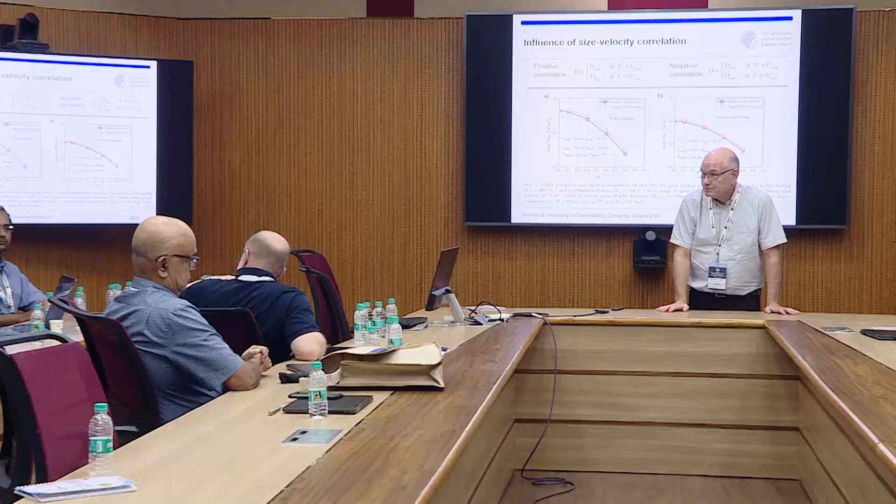There should be an optimum somewhere in between, because if you have very high mass flux, then you flood the surface - listen carefully, this is what could be happening, this is an extension of the work we're doing now. And if you reduce the mass flux, it should get better and better up to a certain point.

Exactly, and also, for example, using an air-assisted atomizer, where the air can push back - we cannot capture that currently, but if you could work out the numbers, you could use it.

So this question is great, because that's exactly what we want to try and do with the tool - that's the practice part, going from physics to practice. It sounds simple, but it took a long time to get this far.

But okay, Marco, this sounds interesting. Yeah.